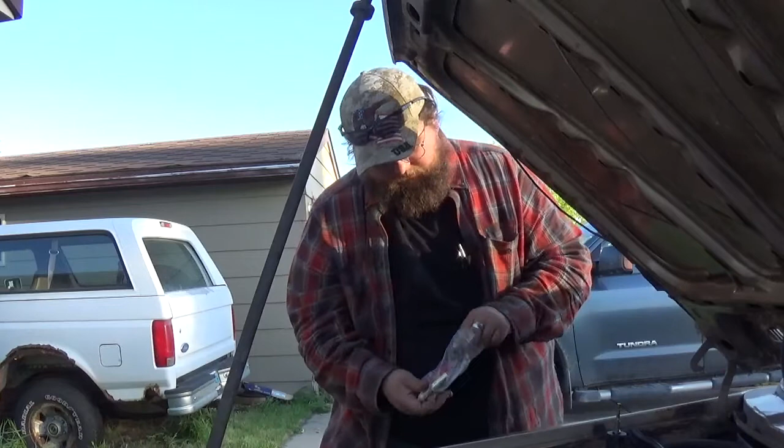But a few of the other tools that you're going to need to do this job. You're going to need a timing service set. The timing pump pin to lock your pump in place. The tool to lock your cam in place. And the tensioning wrench.

Now, once you get the head apart, you're probably going to want to take your injectors out. Well, if you've got enough room and you're brave enough, you can do it with a standard 27mm socket. If not, you're going to have to go out and buy yourself an injector socket set, but make sure that it comes with the 27mm socket, because not all sets come with the 27mm socket. On top of this, folks, you are going to need some sort of penetrant. It's a given, folks.

Now, if you are going to piece out your gasket set yourself and not buy a set, and even the sets that they claim to be a set, if they do not have these babies, which are our injector heat shields, you're going to have to find injector heat shields. You cannot reuse your injector heat shields.

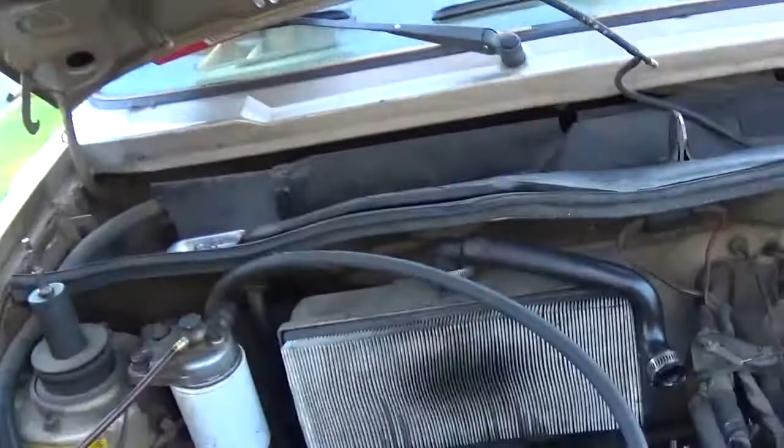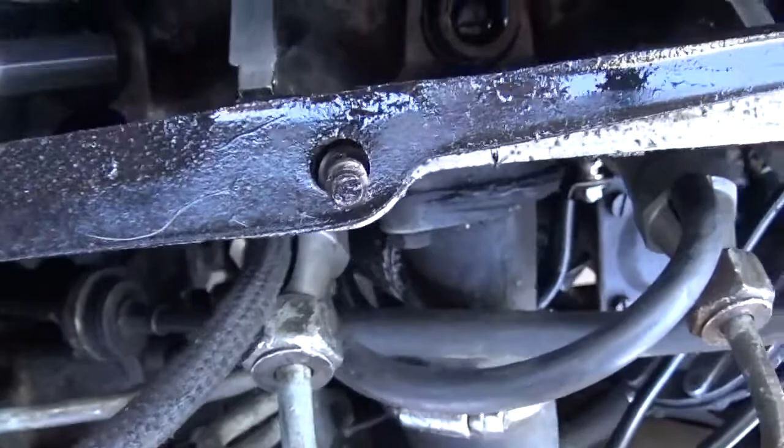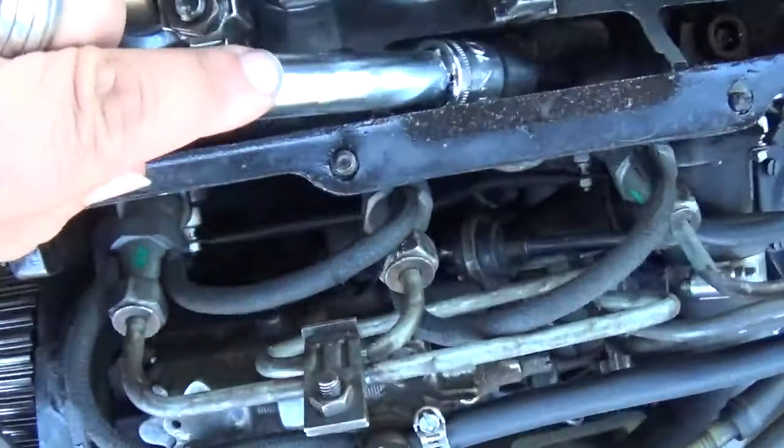Now, if the camera girl can get in here, we'll start talking about head bolts. These head bolts live way the heck down in here. Now there's 10 of these bolts that live in this head, and they're all torque to yield.

Now you also have to figure out what head bolts you have. Since this is an original 81 engine, you will have 11mm head bolts, which are hex-headed bolts. Now, on the 12mm bolts, they take the triple square, so keep that in mind. For torquing purposes, that is big.

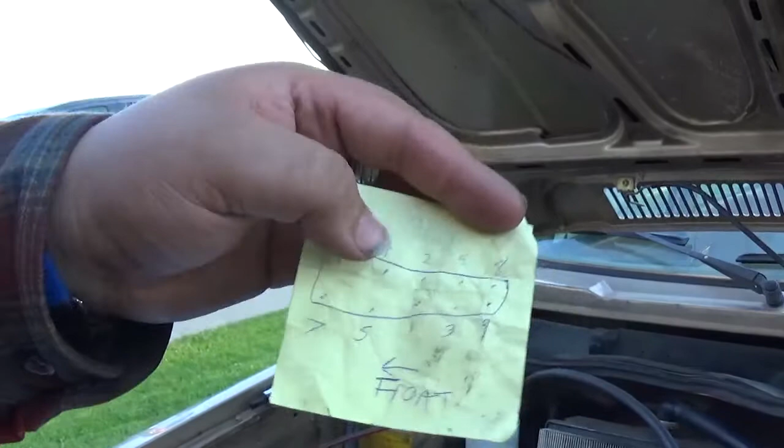Now, when it comes to removing this head, we're not going to remove the head in this video, but I wanted to make dang sure that the information was on the channel. So, we're going to lay the book right here, but we're going to take a look at this first. Okay. This is your head bolt torque tightening pattern.

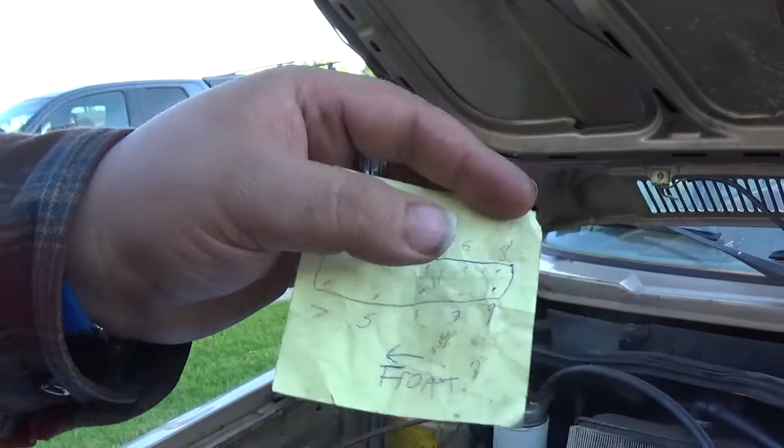Now, when you go to take these out, start at number 10 and work your way to 1. On top of that, do not take them completely out. Just crack them loose and go through the entire sequence, cracking them all loose, and then slowly pull each one out. Now, I'm going to pull the book up,

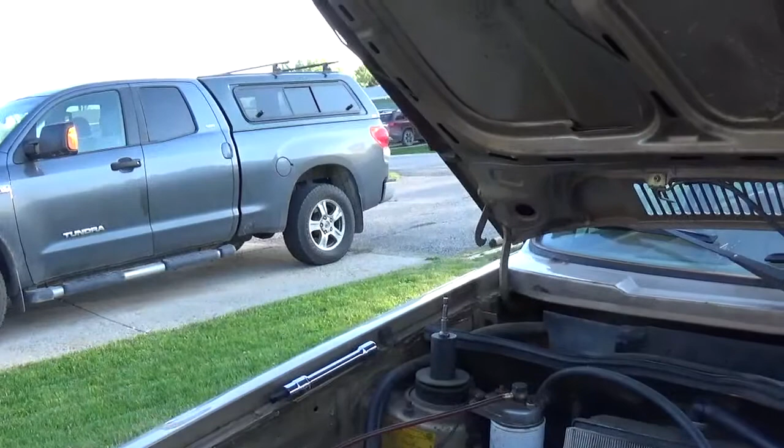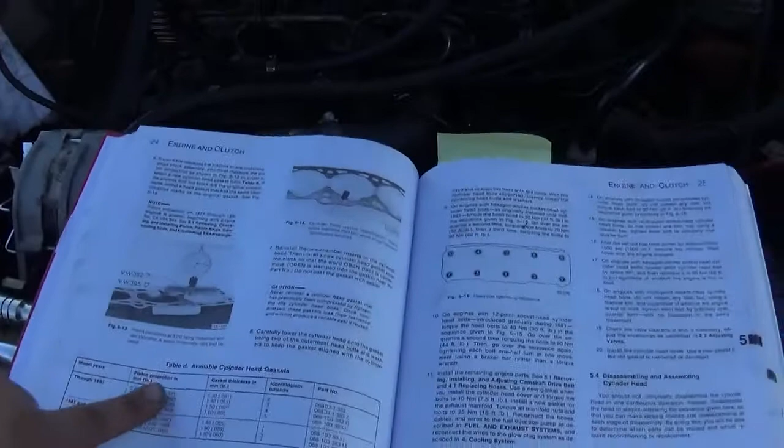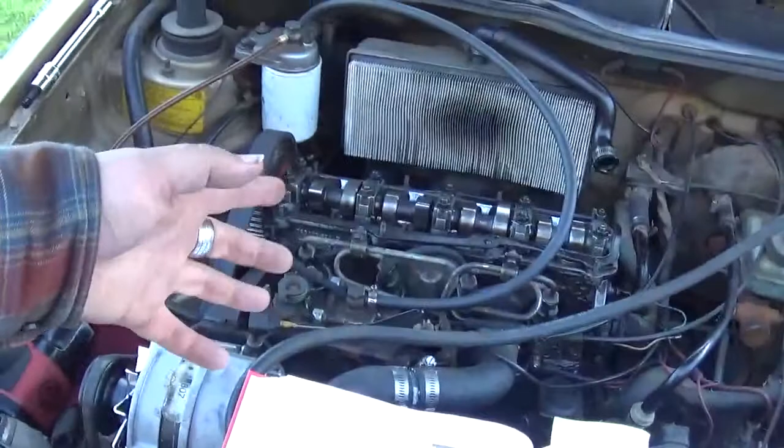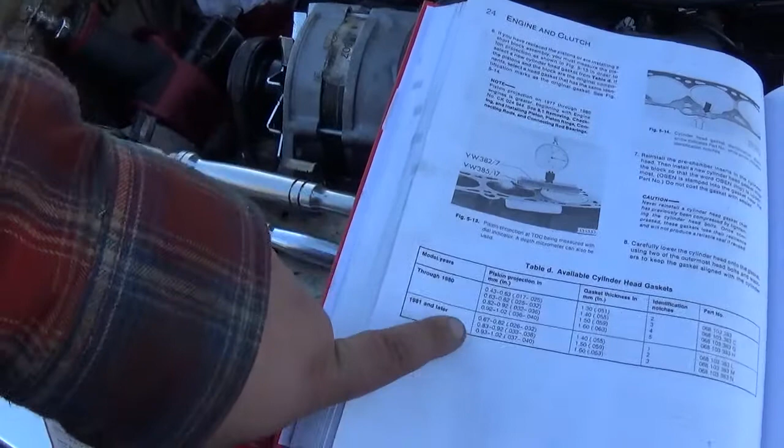and we're going to get some shooting of the book, because on this side it talks about the head gaskets and the fact that you've got 3 notches, or only 1 or 2; in this case in the picture they got 3. It tells you what the thickness of the gasket's going to be, and if you've got a motor that you've taken apart but don't know the head gasket, you can take the projection gauge and come to the book and figure out what head gasket you need.

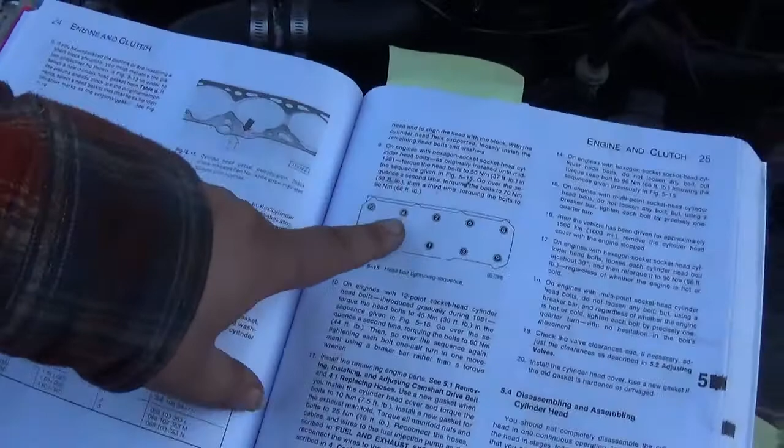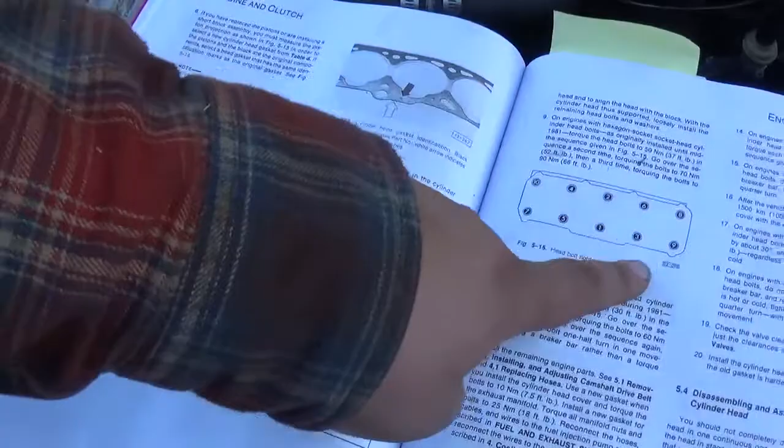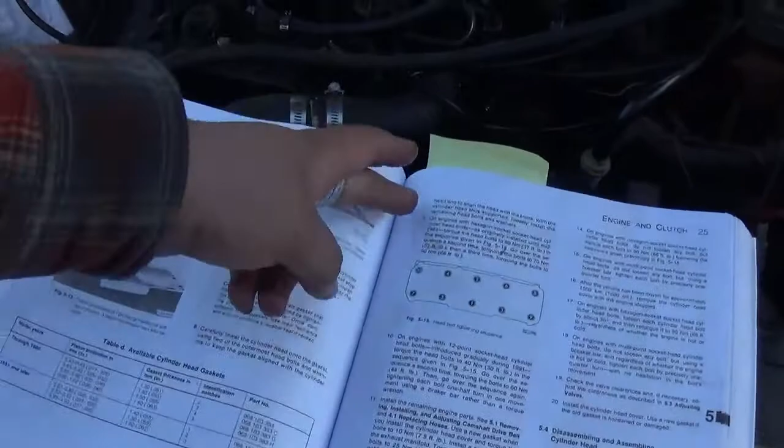So there's that. Now, like I said, the torque tightening sequence is a little weird, and that's why I put it on that piece of paper, because you might not notice that this hump here corresponds to this hump here in the head, where your drain back hole is. Now, it's also got intermingled here the hex head bolts and the 12-point.

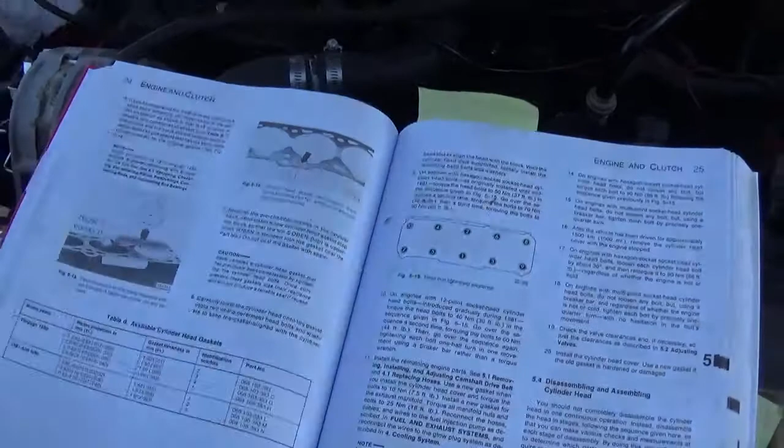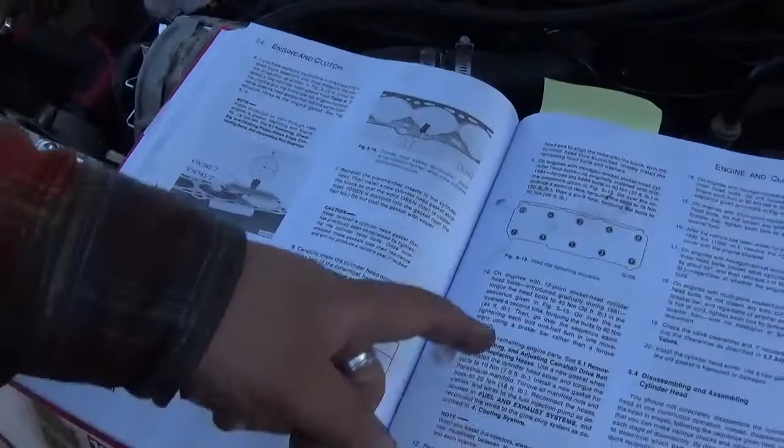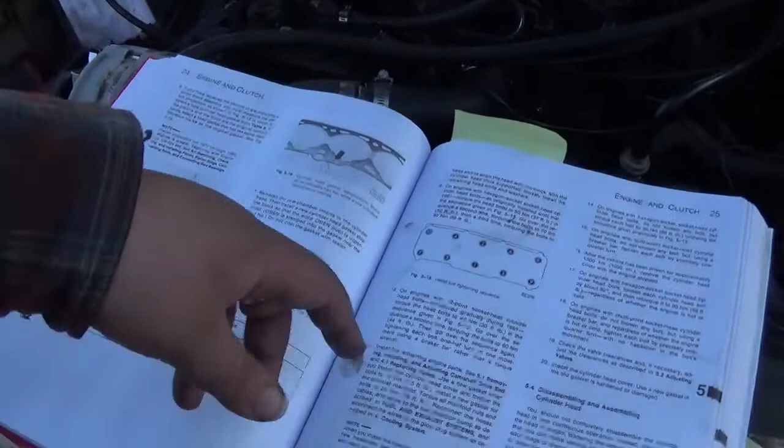Such as when it talks about the 81 and older engines, it torques them down in 3 increments. That means that you're tightening all these once, then tightening them again at another torque, and then again at another. And then it'll come down here and tell you to be careful of removal, but it also tells you, where the heck did I see it, that you gotta torque it again after 1,000 miles.

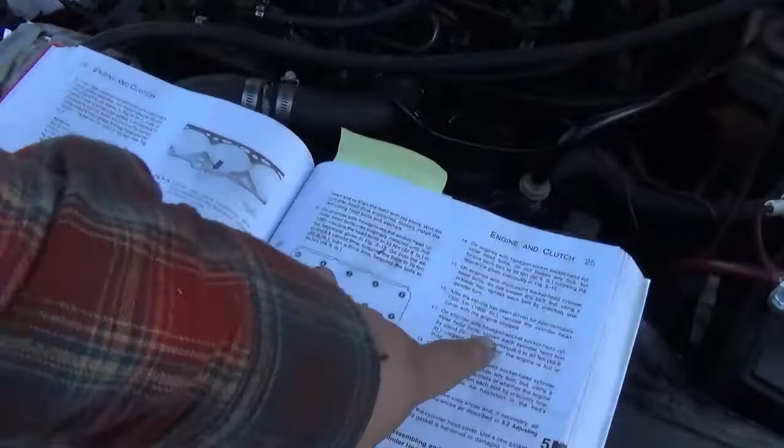So, retighten, and yeah. So, folks, this is not just a day-long procedure. You do it one day and then you drive the vehicle and then you do it again. And that's also why I'm doing this in this format, because once I start pulling this motor apart, I'm just going to be pulling the motor apart.

If you leave comments, I'll try and get them in when I start pulling this head, but make sure that you're at top dead center and that your cam lock plate's going to fit into your hole there. And remember that when you're doing this job, it's not like a small block Chevy; they do have 3 different head gaskets.